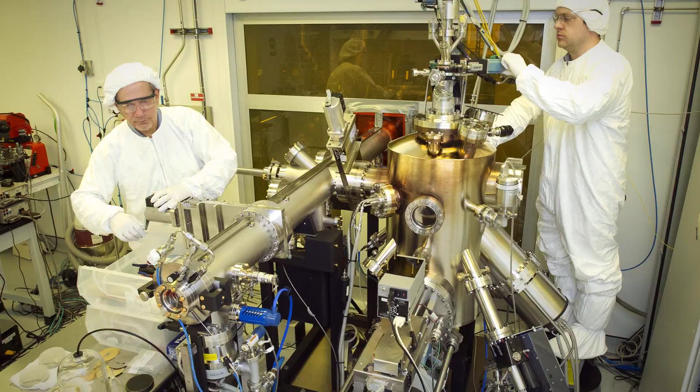The average American pays $1,200 a year to heat their home. In 1972, an architect in New Mexico built one from 70,000 recycled cans that held 70 degrees, no furnace at all. The Department of Energy funded the research, validated the results, then slashed 85% of the budget. Meanwhile, $18 million in lobbying helped 27 states pass codes making homes like it nearly impossible to build.

In the fall of 1973, the world's energy supply was thrown into chaos. OPEC's oil embargo sent crude prices soaring from $2.90 to $11.65 a barrel almost overnight. For American families, the impact was immediate and personal. Heating oil that once cost just 17 cents a gallon shot up to 53 cents in a single season.

Headlines warned of shortages, and anxious homeowners lined up to fill their tanks before prices climbed again. The average winter heating bill tripled, draining household budgets and fueling a sense of crisis. News anchors described the situation as unprecedented, with some regions reporting empty fuel depots and rationing.

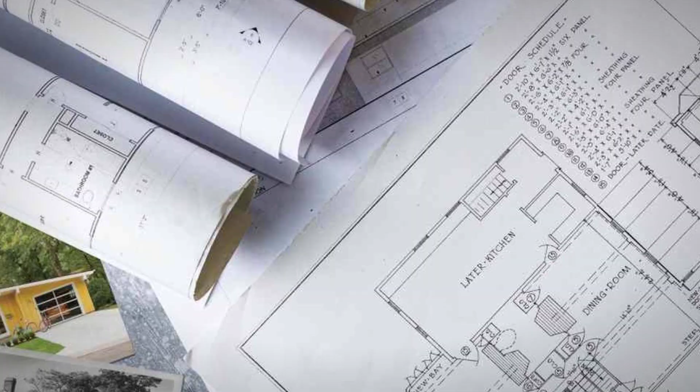Politicians scrambled for answers, while engineers and architects began to question whether homes really had to be so dependent on fossil fuels. The price shock didn't just raise bills, it cracked open the search for alternatives. Suddenly, the idea of a house that could stay warm without a furnace wasn't just a dream, it became a necessity.

In a remote patch of northern New Mexico, Michael Reynolds set out to prove that a house could thrive without a furnace. Working with little more than discarded beer cans, earth, and salvaged lumber, he built what became known as the Thumb House in 1972. 70,000 cans, wired together and mortared into thick, curving walls, formed the backbone of the structure.

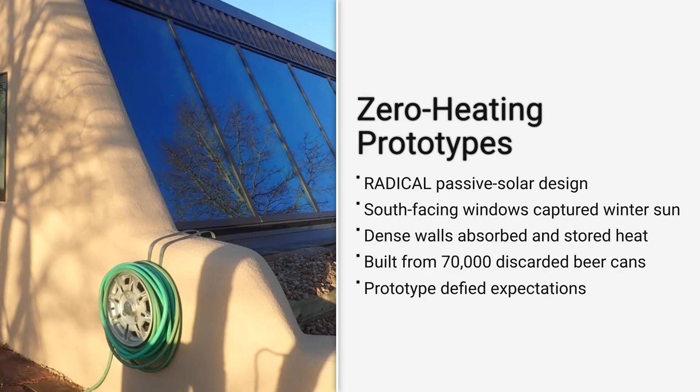The design was radical. South-facing windows captured the low winter sun, while the dense walls absorbed and held heat, releasing it slowly through the night. Reynolds reported that even as desert nights dropped below freezing, the interior stayed between 68 and 74 degrees Fahrenheit, without a single watt of conventional heating.

The Thumb House was more than an experiment. It became a lived-in proof of concept. Word spread quickly, drawing the attention of architects, engineers, and even government officials searching for answers to the energy crisis. Reynolds' approach challenged every assumption about what a home required to be comfortable. And his prototypes showed that zero heating was not just possible, but achievable with materials most people threw away.

Federal support arrived in 1976 when the Department of Energy launched a dedicated passive solar program. With an initial budget of $12.3 million, the agency funded a wave of test homes and demonstration projects across the country. Dr. Susan Miller, a lead researcher, oversaw field trials from Arizona to Vermont, tracking indoor temperatures and energy bills through the coldest winters. The results were hard to ignore.

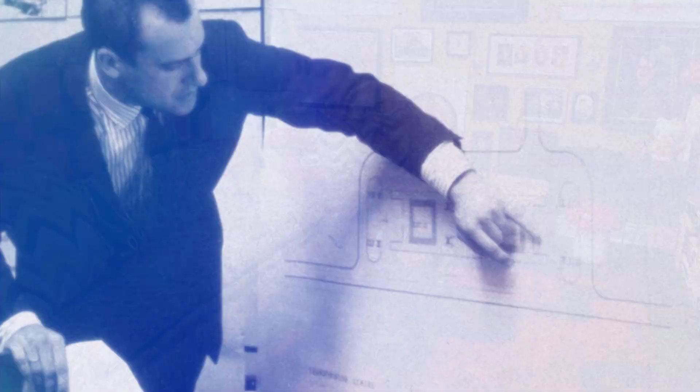Many test homes slashed heating demand by more than half, and some reported near zero utility costs for months at a time. Reports from the program documented how careful orientation, thick thermal mass walls, and super insulation could keep buildings comfortable with little or no mechanical heat. Architects and engineers pored over the data, and for a moment, it seemed possible that these methods would become mainstream.

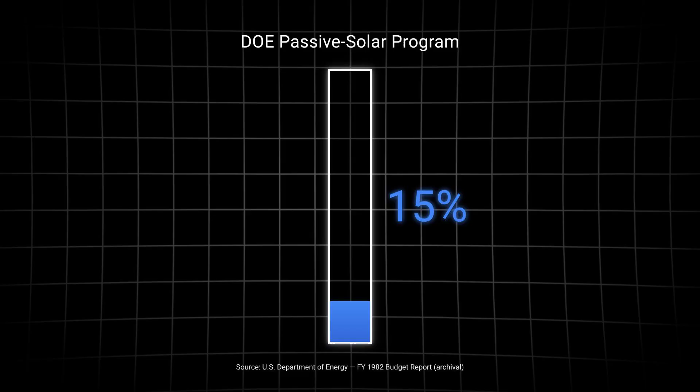But in 1982, the program faced an 85% budget cut. Funding for new research dried up, and technical teams were disbanded or reassigned. The official endorsement faded almost as quickly as it had begun, leaving a trove of credible results but little momentum to carry them forward.

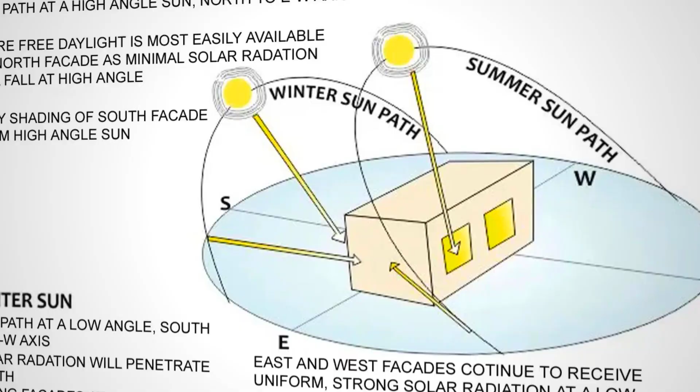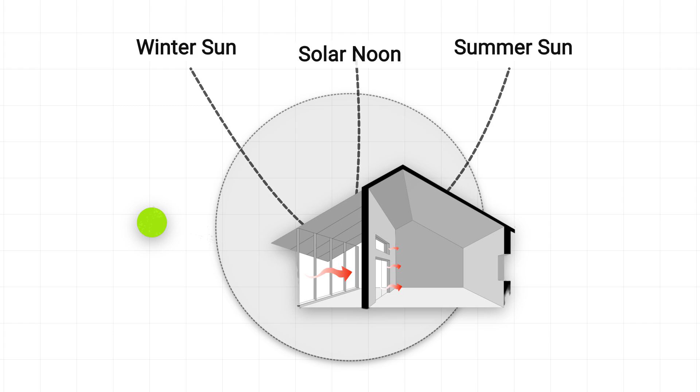Four elements form the backbone of a house that needs little or no heating. The first is orientation. The long side of the building faces true south within about 15 degrees, so winter sunlight pours deep into the living spaces. Builders calculate the angle based on latitude, making sure the sun's low arc in January hits the thermal mass, while summer overhangs block the high sun to prevent overheating.

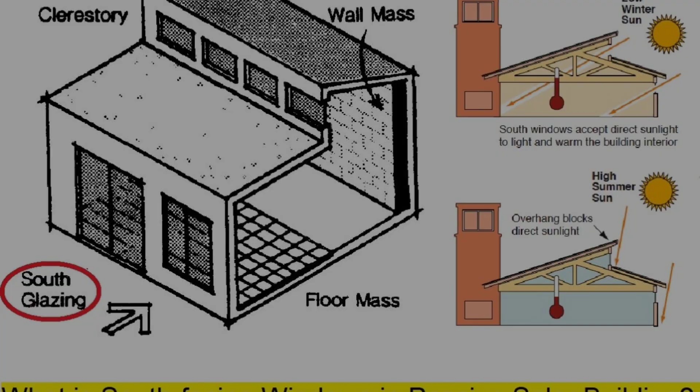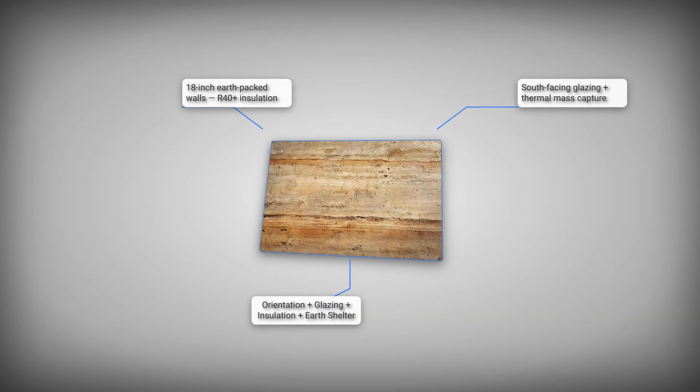The second pillar is glazing. Only 7 to 12% of the floor area is devoted to south-facing glass, enough to capture heat, but not so much that it escapes at night. The third is insulation. Walls are built thick, sometimes 18 inches, packed with earth, concrete, or dense insulation, reaching R-values of 40 or higher. Roofs go even further, with R-60 not uncommon.

Finally, earth sheltering. Three sides of the building are bermed with soil, often 3 feet deep. The ground's steady temperature buffers against outdoor swings, stabilizing the interior. When these 4 pillars are combined and tuned for local climate, heating demand can drop to near zero, even in places where winters are harsh.

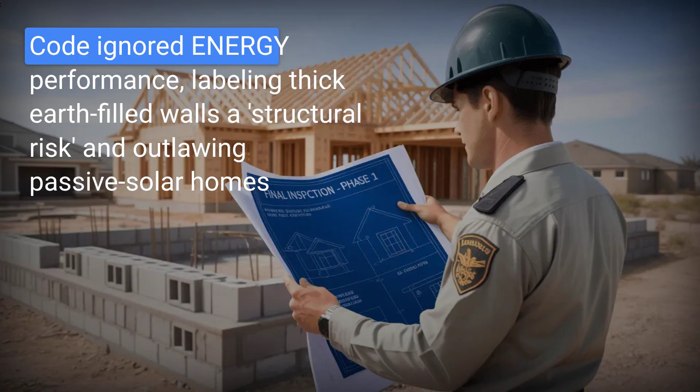Alan Ortiz, a builder from Colorado, watched as the rules for new homes shifted under his feet. In 1980, the Uniform Building Code introduced Section 24A, which mandated that every concrete wall in a home, even those built for thermal mass, must be reinforced with steel rebar every 24 inches. For Ortiz, this meant an extra $2,700 in materials and labor per house, enough to wipe out the savings from a passive solar design. The code didn't mention energy performance. It simply treated thick, earth-filled walls as a structural risk, regardless of their proven stability.

At the same time, the Federal Housing Administration updated its mortgage guidelines. By 1979, the FHA required that any home eligible for a federally backed loan must include a central heating system connected to the gas or electric grid. Builders who wanted to use solar mass or earth sheltering found themselves boxed out of mainstream financing. Ortiz and others petitioned the state, but the amendments spread. 27 states adopted similar language over the next decade. For many, the promise of a house with no furnace became a legal impossibility, not because the science failed, but because the rules changed the game.

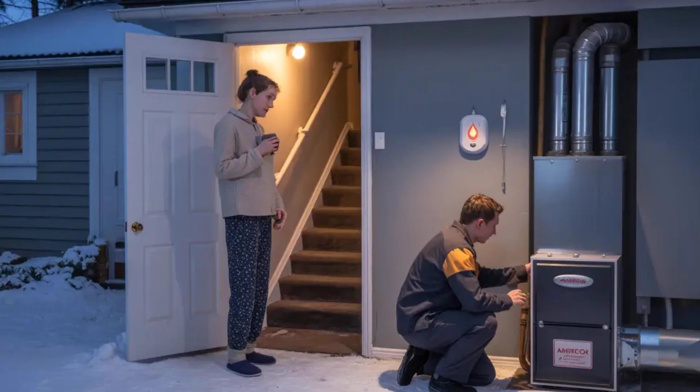Utility and builder associations did not sit on the sidelines as passive solar and earth-sheltered designs gained traction. Between 1978 and 1984, electric and gas industry groups poured more than $18 million into lobbying efforts aimed at shaping building codes and public policy. Their message was clear: new homes should include conventional heating systems, tied to the grid, and built to industry standards. This spending did not slow with time. From 1990 to 1995, another $12 million went to campaigns and legislative outreach, reinforcing the idea that homes without central heat, or standard HVAC, posed risks to safety and reliability.

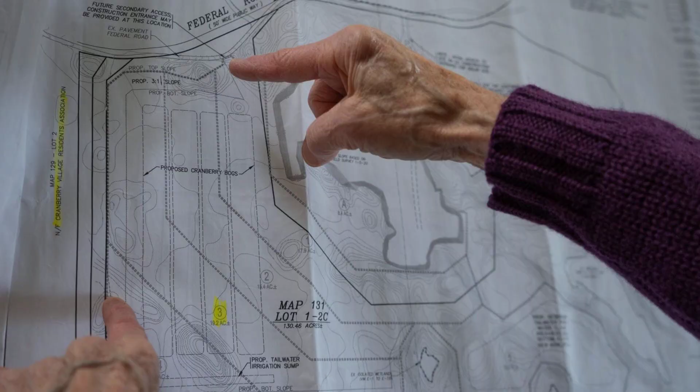These coalitions brought together utility companies, construction lobbies, and code officials, working in tandem to influence state and national regulations. The result was a set of rules that made it harder and often more expensive for builders to pursue alternatives, even when the science supported them. Financial muscle, not technical failure, became the hidden driver behind the barriers that would persist for decades.

Heating a home in the United States is not getting any cheaper. In 2023, the average American household paid about $1,200 just to keep warm through the winter. Some states feel the pinch more than others. Colorado's typical bill lands near $90 a month, while in Texas, it's closer to $150. These numbers add up fast, especially for families living in drafty or poorly insulated houses. By contrast, homes built with thick thermal mass walls, deep insulation, and careful orientation have reported heating costs as low as $100 a year, or sometimes nothing at all. The difference isn't just a matter of comfort. It's a question of whether a family spends hundreds or thousands each year, or almost nothing, just to stay warm.

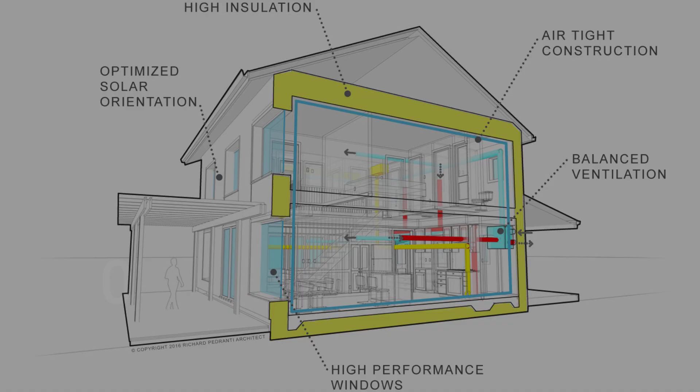Germany took a different approach. In 1990, Wolfgang Feist and Bo Adamson developed the Passivhaus standard in Darmstadt. Their goal was simple: build homes so efficient that a single 200-watt heater, about the power of 2 light bulbs, could keep a family warm through the winter. The Passivhaus formula set a strict limit: no more than 15 kilowatt-hours per square meter per year for heating. By 2022, 12% of all new homes in Germany met this benchmark. These buildings rely on airtight construction, thick insulation, and strategic window placement to trap and hold warmth. The results are clear: homes that need almost no purchased heat, even in northern climates.

In 2022, a city ordinance in Texas opened the door for builders to try something different. Emma Torres was among the first to take advantage. Her permit was approved for a home with 18-inch thick walls and a roof insulated to R60. After her first winter, her entire heating bill came to just $95. This was not a theory, it was proof, built from the ground up.

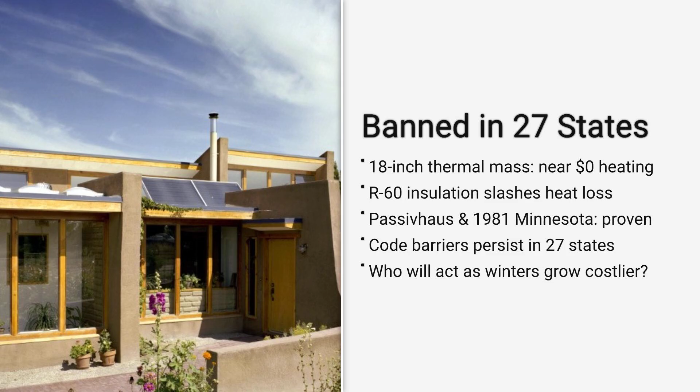Today, homes with 18-inch thermal mass walls and R60 insulation still face code barriers in 27 states, despite the 1981 Minnesota study and German Passivhaus standards proving the math. As household heating costs hit record highs in 2023, what we choose to allow or ban shapes every winter ahead.